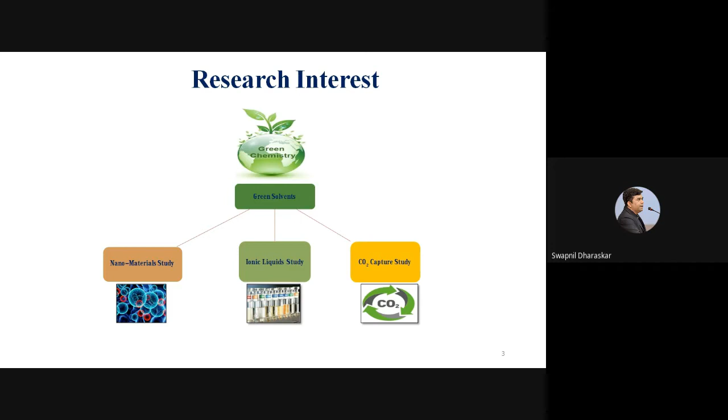As far as the first slide is concerned, I want to highlight that I'm working specifically in the area of green chemistry, under which I'm working on nanomaterials, ionic liquids, and CO2 capture. A couple of years before, we received 2 mega projects in our department under the Mission Innovation Carbon Capture Challenge. I got one project worth rupees 60 lakhs, and I'm working on it to identify the best suitable ionic liquid membrane for CO2 separation efficiency.

And as Dr. Anurag told me, in the first session, Dr. Nitin Lapshetwar sir already delivered a talk on separations and other issues. So I don't want to go much deeper, but I just want to give you an overview of all these processes. But before that, I want to introduce the team members of my research.

Currently, some of the team members from the European side and the South Korean side are involved in our project, along with an industrial partner from the Indian side as well. Professor Mika Sillanpää is currently working as the director of the Department of Green Chemistry, Lappeenranta University of Technology, Mikkeli, Finland, under whom I have done my postdoctoral study as well.

So now to begin with, I just want to give you some highlights about CO2. All of you know that currently we are facing lots of problems in terms of climate change. If you look at the weather outside right now, you can see how it is. For the last 3 to 4 days we have not even seen the sun. This is happening because of climate change, and many of you are already experts in this field.

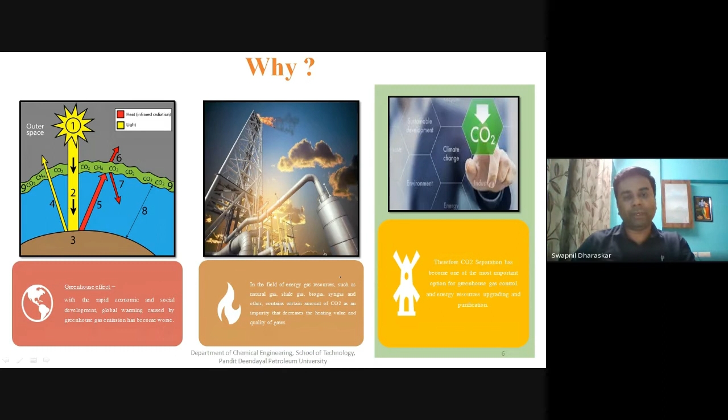In the field of energy, gas resources such as natural gas, shale gas, biogas, syngas and others contain a certain amount of CO2 as an impurity, which decreases the heating value and quality of the gases. That's the second point that motivated us to work in the field of CO2. And third, CO2 separation has become one of the most important options for greenhouse gas control and energy resource upgrading and purification. That's why we decided to identify the best suitable process for energy efficient CO2 separation.

Now, as far as the need of the study is concerned, emissions of greenhouse gases will increase the average global temperature by 1.1 to 6.4 degrees Celsius by the end of the 21st century. And global warming of more than 2 degrees Celsius increase in the global average temperature will lead to serious consequences in terms of the environment and pollution.

Global greenhouse gas emissions should be reduced by 50 to 80% by 2050, according to the IPCC. And to keep the temperature rise less than 2 degrees Celsius relative to pre-industrial levels, CO2 emissions should be reduced globally by 41 to 72% by 2050. And this is the challenge right now.

Even if you look into the Niti Aayog report, they have also highlighted that we have to work on CO2 minimization, because the adverse effects of CO2 are really very impactful in terms of environmental sustainability and other issues as well. Now, basically, this is the basic background of CO2, why we are trying to work on CO2 separation.

As far as the objective of our study is concerned, I don't want to go much deeper into my research area, but I just want to give you an overview of the objective of our work. Based on the entire literature and understanding, we decided to work on a liquid supported membrane, because nowadays there are some commercialized membranes available in the market which are really useful to separate CO2. But again, they have some limitations.

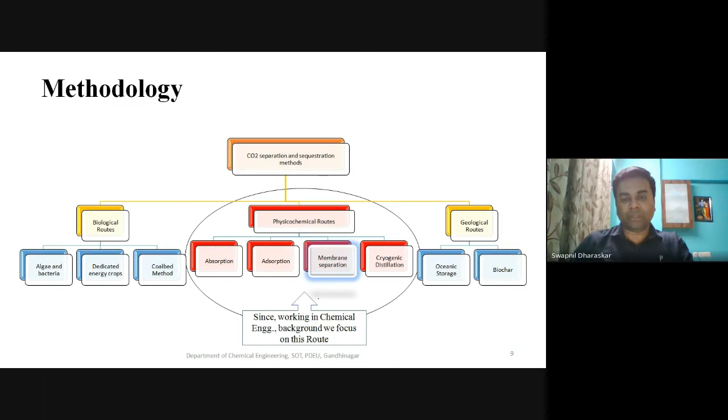But if we go with the physicochemical routes, you can identify different techniques like absorption, adsorption, membrane separation, and cryogenic distillation. Some of my colleagues are working in the area of absorption and adsorption, but we targeted membrane separation specifically. We are trying to use a membrane support and modify it with ionic liquids to produce the best possible support, which is really useful to enhance CO2 separation from the industrial stream. That's why we decided to work on this area, and this is the methodology for our ongoing research at PDEU campus.

Now, I just want to give you a glimpse of why we are working on membrane gas separation processes. Whenever we decide to go for any sort of research or work, we always think about a few parameters, and based on those we can identify whether the process we are preferring is really effective or not. These parameters are cost effective, energy efficient, clean energy, and efficient products and services. And the most important part is fast separation with simplicity of operation and high space economy. For all these parameters, we decided membrane gas separation is a very good option compared to other CO2 capture processes.

In the current state, in our department, we have some colleagues working on adsorption and absorption, and we have compared their results with ours. In terms of flexibility, we have identified that this method is really flexible in comparison with adsorption and absorption processes. But sincerely speaking, at present, most industries prefer the absorption or adsorption route for CO2 separation. But very soon they will identify alternatives to those processes because of other issues and for good efficiency. They may go for membrane or membrane-like separation processes.

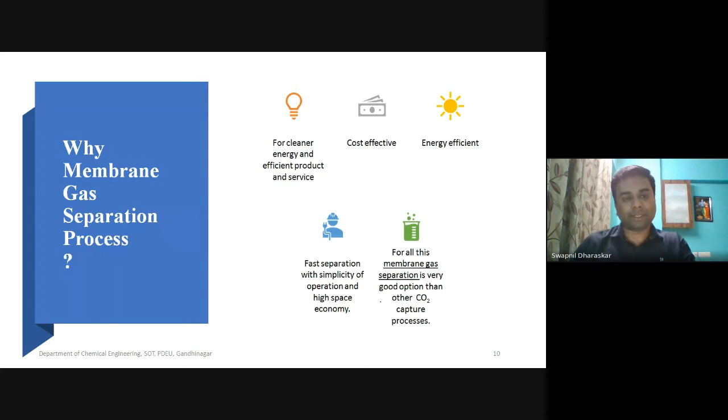Now we decided to work on the membrane in line with the ionic liquids, since basically I did my PhD in the area of ionic liquids and postdoc in the area of molecular simulations and ionic liquids. So I decided to scale up this ionic liquid in support with the membrane, and that's why we decided to club both things together and try to make such an assembly which is really impactful for CO2 separation.

So as I mentioned about the membrane, similarly I just want to highlight some important facts about ionic liquids. Some of you might be aware of what exactly ionic liquids are; basically these are compounds having a melting point above 0 and below 100 degrees Celsius. These ionic liquids have very good properties. Sometimes ionic liquids are termed green solvents as well, because they exhibit green properties.

The first property is high ionic conductivity. The second one is non-flammability, very low vapor pressure, non-volatile in nature, high thermostability. Because as far as CO2 separation is concerned, we do require high thermostability. And in that case,

Dr. Anurag, hope I'm audible to all of you. Yes, sir, you're audible, sir.

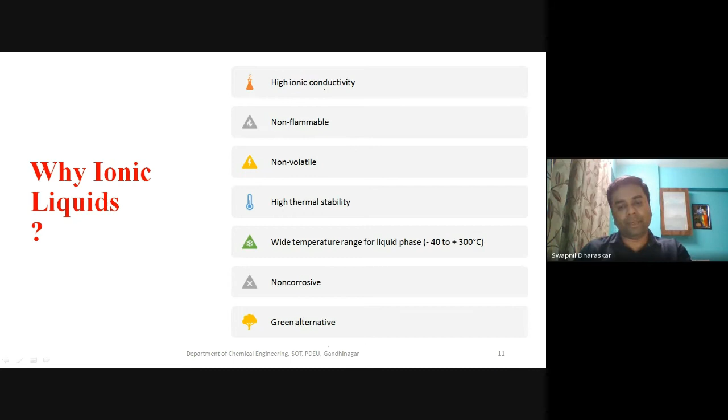Okay, fine, thank you. So these ionic liquids have good thermostability, and based on this, in our research, specifically for CO2 separation, we can make a membrane which sustains high temperatures. Then there's a wide temperature range for liquid phases, -40 to 300 degrees Celsius, non-corrosive in nature, and as I mentioned, it exhibits the properties of green solvents, and that's why it's considered a green material and green solvent as well.

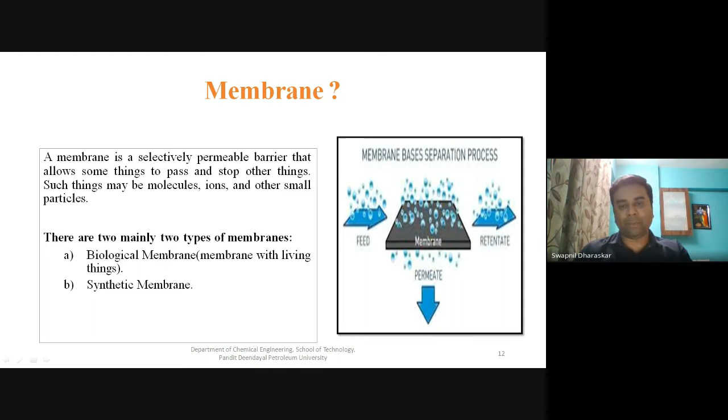Now membrane, I don't want to explain much because many of you are already familiar with it. Basically it's a kind of barrier which allows something to pass and stops other things, such as molecules, ions, and other small particles. There are two types of membrane: biological membranes and synthetic membranes. In our case, we prefer synthetic membranes, or commercially available supports, which we modify with ionic liquids and use for the enhancement of CO2 separation.

Now, the most applied membranes for gas separation fall into two categories: organic membranes and inorganic membranes. Organic membranes include glassy polymers and rubbery polymers with high permeability and low selectivity. Inorganic membranes consist of metals, carbon molecular sieves, carbon nanotubes, zeolites, clay, and silica. These membranes have low permeability but high selectivity.

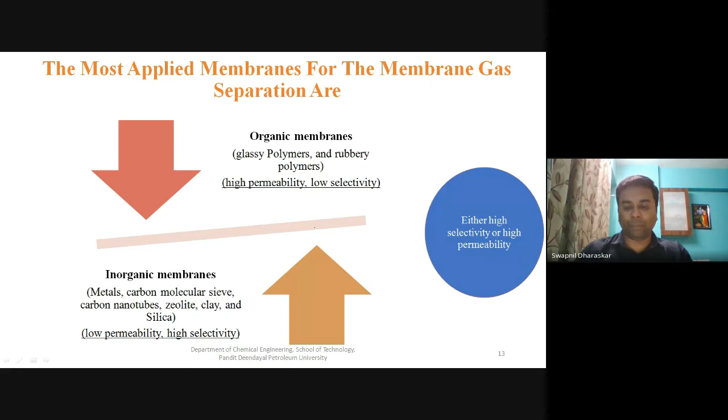Our target is high selectivity, and that's why we mostly prefer inorganic membranes for our study. Sometimes, when high permeability is required, we go for organic membranes. We are doing a comparative study of which membrane is good, organic or inorganic, and where to use which. Based on either high selectivity or high permeability, we decide which membrane support to identify for CO2 separation. These are some membrane classifications.

I don't want to highlight much about it; it depends on symmetric nature, asymmetric nature, and tubular membranes, hollow fiber membranes, flat sheet membranes, dense membranes, porous membranes. In our case, at the moment, we are working on flat sheet, dense, porous, and hollow fiber membranes. So far, we have not tried tubular membranes. We are going for asymmetric kinds of membranes as well. So with flat sheet, dense, and porous membranes, we are working on identifying CO2 separation enhancement.

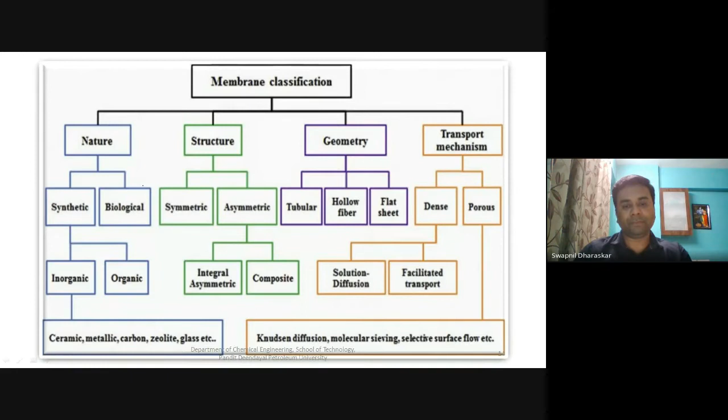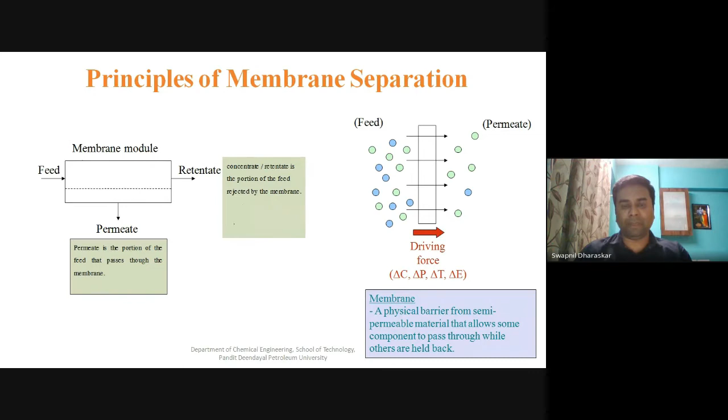Now, this is the principle of membrane separation. It's a physical barrier of semi-permeable material that allows some components to pass through while others are held back. When I show you the schematic of our setup, you will realize how this membrane acts as a proper barrier. So, CO2 separation using membranes: this is the mechanism behind it.

Basically, it's a pressure-driven process where the driving force is the partial pressure difference of the gas in the feed and the permeate. The most important parameters for membrane gas separation are selectivity and permeability. Based on these parameters, we have to select which membrane with which support is best suited for the enhancement of CO2 separation.

So here we use highly selective thin membranes and commercial membranes. There are some membranes available in the market, and right now industry prefers membranes based on polymers and cellulose acetate, but they have a selectivity of around 26 or 28.

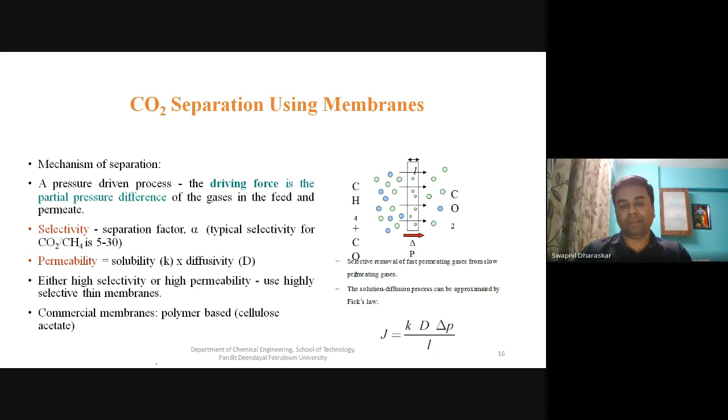But in our case, we are getting the selectivity more than 35. That might be the one factor we can make this technique commercialized in comparison with these readily available polymer based membranes and the cellulose acetate based membranes.

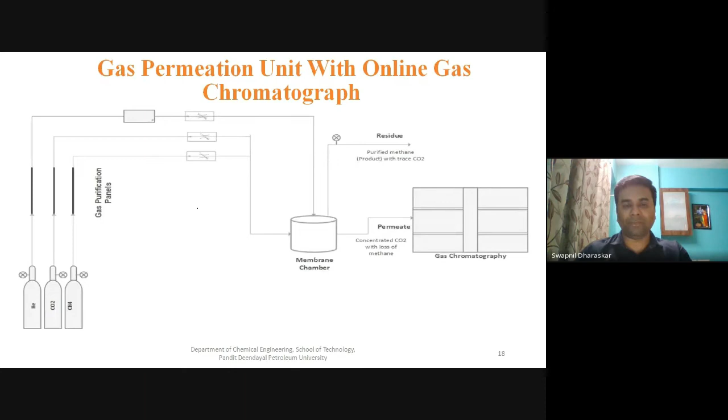Now, this is the schematic of the gas permeation unit with online gas chromatograph. We are having a setup available at our campus. We procured a setup of around 20-25 lakhs rupees of this gas permeation setup, where you can see this is the entire setup of the gas permeation, where we can keep the membrane. There is one membrane module. You can see here. This is the membrane module, flat sheet membrane module.

We have different types of modules to attach here. First, we tried with flat sheet. Then we can go for hollow fiber, and we can prepare porous and dense membrane. And then there are different types of inlets and outlets. Here you can see the mass flow controllers are there. And on another side here you can see the CO2, methane, helium gas, and this is the entire setup.

Here you can see this is the actual membrane module, but we have modified that module, and you can see the entire module, how it works. And we have the provision of the online GC, whatever gas we are passing, let's say in terms of CO2 and methane. So this particular GC will give us the idea about the composition.

Now, let's say biogas contains carbon dioxide and methane. So likewise, we are maintaining the CO2 and CH4 compositions, and we are trying to identify in which ratio we are getting CO2 separation and methane separation. Likewise, we will do some calculations based on some correction factors, and finally we are able to look into the actual value of how much CO2 got separated and how much methane we have separated. So this is the entire setup of the gas permeation, which is available at the Department of Chemical.

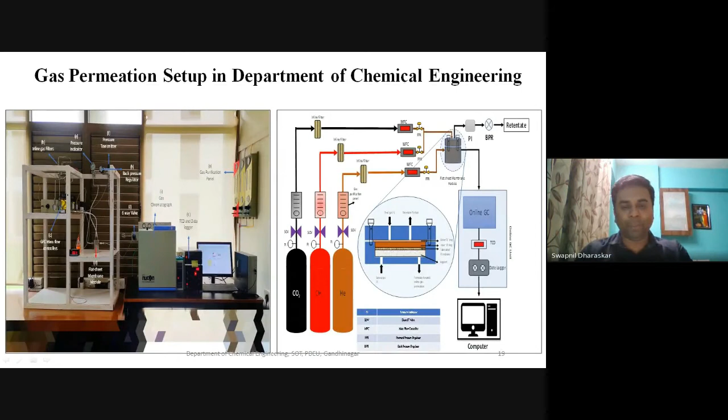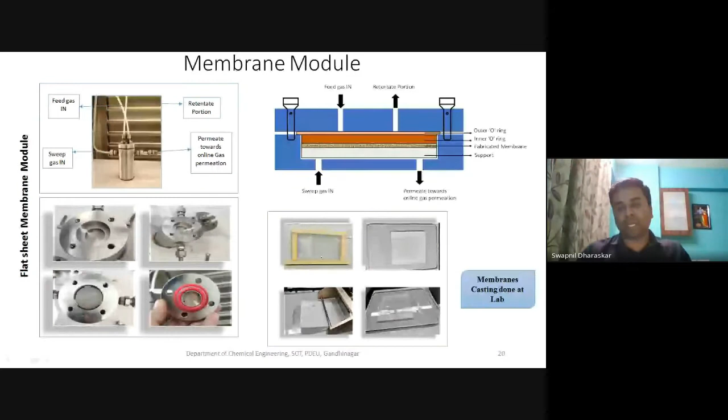Here you can see there are different types of membrane modules. As I mentioned, we are having different types of modules. So this is the actual image of the first flat sheet membrane module, how it looks, and then how we can prepare the membrane. We do prepare membrane. We cast membrane in our department itself. We cast different types of membranes.

Polymeric membrane, cellulosic membrane, cellulose acetate membrane, and PVDF support, PES, PTFE kind of membranes that we cast at our laboratory. And we also synthesized different types of novel ionic liquids to impregnate into this membrane and make a supported liquid membrane, which is really applicable for enhancement of CO2 separation. So these are some routes how we can fabricate the supported ionic liquid membrane, and this schematic gives the idea about how we can cast the membrane.

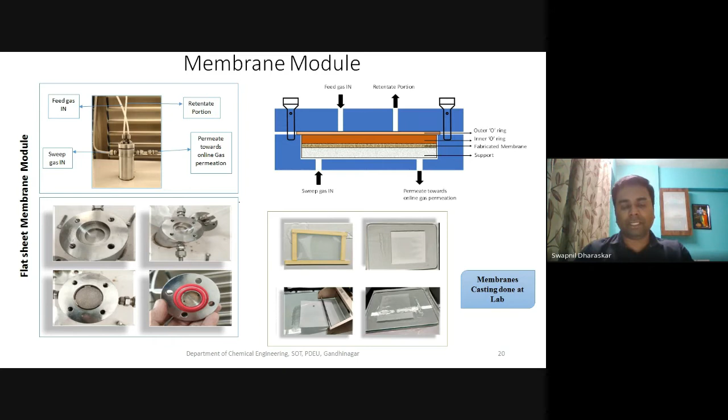Now, this is about the fabrication. Initially, I have given the idea about the setup, how this setup looks. So this is the entire CO2 permeation setup. These are the modules, and this is the fabrication of the ionic liquid supported membrane. Now I'm just trying to give you the idea about what kind of ionic liquids we have preferred earlier, and we published some work based on this idea. And recently we have submitted one idea to file the patent as well.

So if you look into this, first of all, our target is to identify the cost-effective membrane or cost-effective ionic liquid supported membrane. Okay, so that's why we first decided to go with imidazolium-based ionic liquids, which are very easy to synthesize, very easy to prepare, and with the help of very basic facilities, you can easily synthesize this kind of compound at your own laboratory.

But later on, we decided to go for some modified class of the ionic liquid. There are different classes of the ionic liquid like thiazolium, pyridinium, phosphonium, and a few more. But since the toxicity matters, we have not preferred thiazolium. We went for pyridinium, and then imidazolium and phosphonium. And some of the results from phosphonium and pyridinium were very impressive, and based on that we decided to file one patent based on those results.

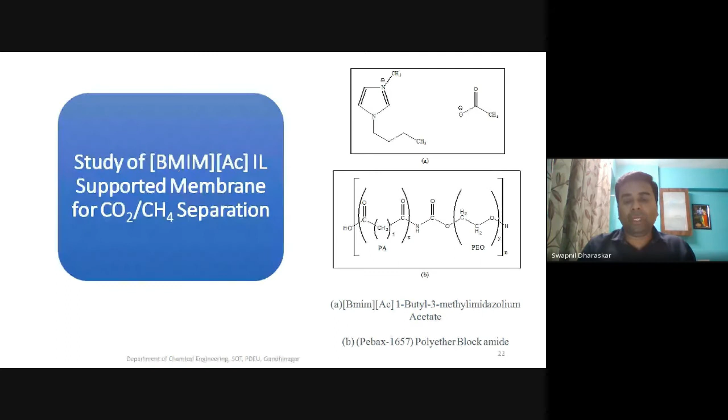Since ionic liquid is costly, we prepared different supports with some weight percent. Let's say first we have taken 5% of ionic liquid and we prepared a 5% ionic liquid supported membrane. Then we go for 10%, 20%. Likewise, we have prepared up to 20% ionic liquid supported membrane, and we have done analysis for the CO2 separation for all these membranes, and the results are pretty impressive.

Even if you are continuously purging this CO2 and methane, still there is no breakage happening in the membrane, though there might be some pores that got blocked. But as far as breakage is concerned, we have not seen any breakage occur during the operation, even prolonged operation. And that's why we decided to go for some support which is really useful in terms of withstanding high temperature, high pressure.

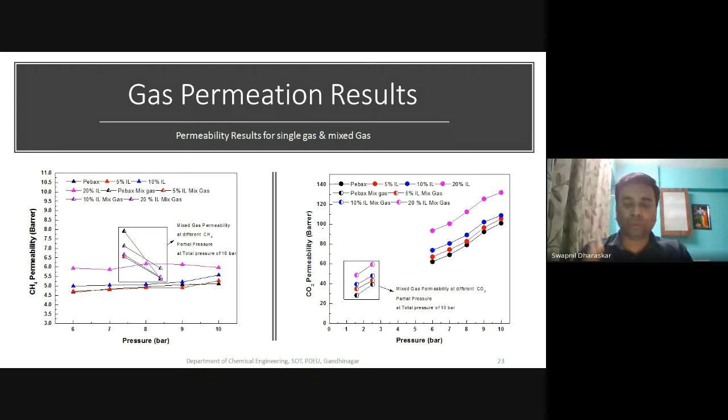And that's the uniqueness of our project, because when we got the project, the committee gave us one task: Swapnil, if you are capable enough to prepare such a membrane which withstands more than 5 bar pressure, that will be a good thing for us. So at this moment we have identified a few supports which are really useful to withstand pressure up to 7 to 8 bars.

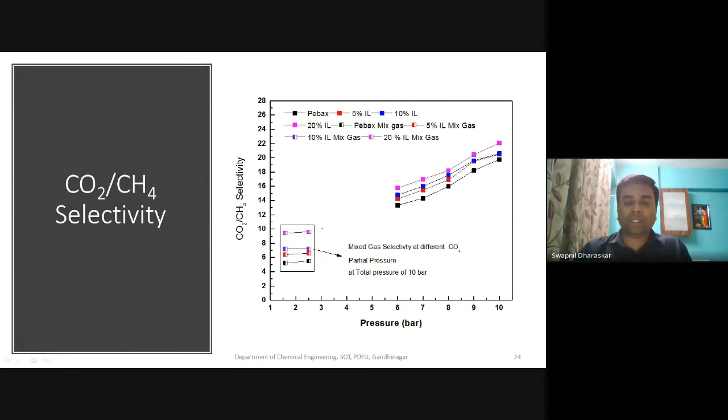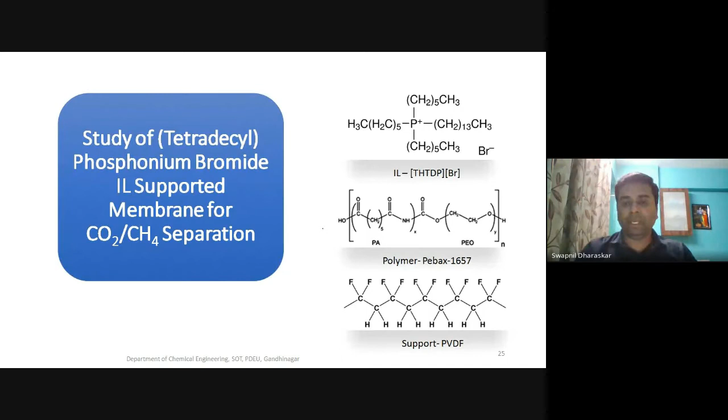So this is about the CO2 methane selectivity. As I mentioned, permeability and selectivity are the important parameters, and we are extensively working on these two parameters to measure the effectiveness in terms of the separation of the CO2. Earlier we decided to go for imidazolium. Then we shifted from imidazolium to a phosphonium bromide kind of compound. And with the study of this phosphonium, we have received promising results, and that we also published in an ACS journal, where these results have been claimed.

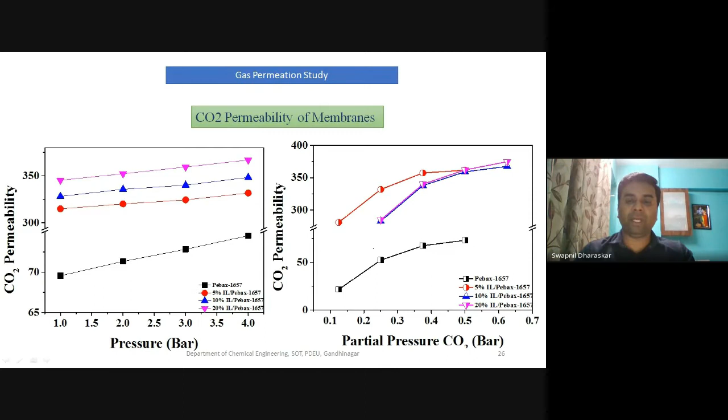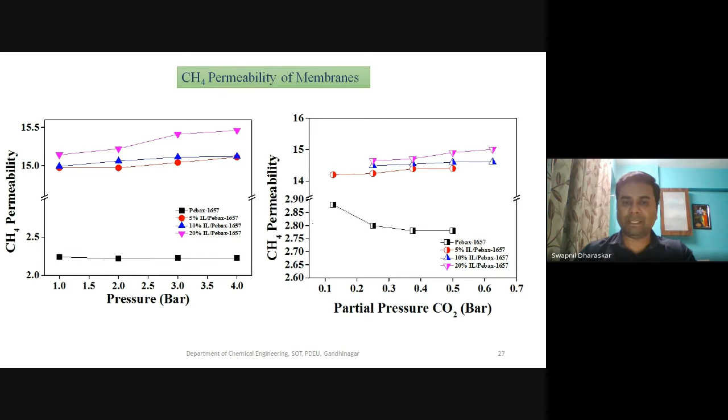And here you can see the CO2 permeability with 5 weight%, 10 weight%, and 20 weight% ionic liquid. At the initial level, we had taken the support as a plain Pebax, but here we have changed the support from plain to Pebax-1657. And again, we are identifying up to what pressure this particular membrane withstands, and with the phosphonium based ionic liquids with some membrane support, we were able to identify that this particular support withstands 8 bar pressure very easily without any breakage during the operation. So this is all about the permeability and the selectivity, and this is some data of CO2 and methane separation.

I don't want to go into much detail about it, but keep in mind one parameter here: the selectivity matters a lot, selectivity and permeability. If you are able to get a good selectivity, then definitely your separation will enhance, and that's why your role is to identify the best suitable membrane support, in addition to the ionic liquid as well.

And other than ionic liquid, you can try it with some nanofluids. Some of my researchers are working on this now. We are shifting from ionic liquid to the nanofluids, and we are also targeting work on the deep eutectic solvents. In these two areas right now, many researchers have diverted their study from the ionic liquid into the deep eutectic solvents and nanofluids, specifically for the enhancement of the CO2 separation.

Okay. So this is about the CO2 separation, and I hope we will take the questions at last. But this is all about the CO2 separation, the exact process for the CO2 separation. So as I mentioned, the gas separation, gas permeation membrane processes is a very efficient process for CO2 separation, and that's why we are claiming this particular process is really good in comparison with the absorption and some other routes also.

Some of the researchers claim that the biological route is also very effective. Obviously, it will be really effective, but there are some limitations. You cannot work on the biological route for the entire year. You have to maintain certain specific conditions. Many of you might have heard the name of ICT; they have developed their own lab to generate some algal kind of things, and through algal biomass they are able to capture and separate the CO2. But here, in our case, we could not do that. That's why we decided to go for this particular process.

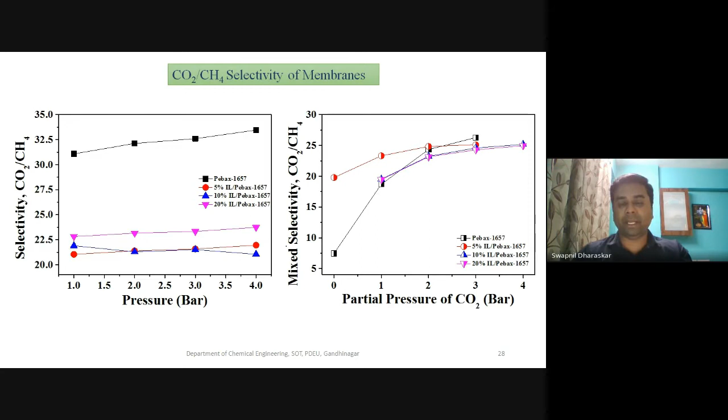Now, I just want to highlight something in line with the nanomaterials. Whatever I mentioned so far is in line with ionic liquid supported membrane for CO2 separation. Now I'm slightly changing the topic from ionic liquid supported membrane to nanomaterials, and I'll give you the idea how these nanomaterials also create good impact in terms of environmental sustainability and the CO2 separation as well. Some of you might be comfortable synthesizing nanoparticles, and many of you have the idea of the prerequisite to identify the best efficient nanoparticles.

Okay. So basically, if I want to identify the best efficient nanoparticle, then I must go for two parameters. Whenever I'm planning to synthesize the nanoparticles or nanomaterial, it should have a high surface area with good chemical reactivity. Basically, in nanoparticle synthesis, we always think about uniform size, shape, and distribution. These two parameters, size and shape, play a very important role. If you are able to maintain a uniform size and shape, then ultimately you can get a high surface area, and that high surface area gives you good chemical reactivity for the conversion to the final product.

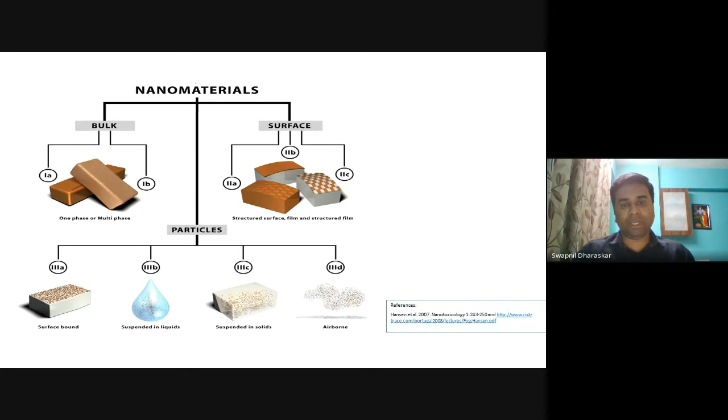That's why we decided to go for the nanomaterial, and we diverted some of our research into the nanomaterial, and some of the researchers are working in the field of nanomaterial as well. If you classify the nanomaterials, there are different classifications like 0D, 1D, 2D, and 3D nanoparticles. For example, 0D nanoparticles are the common kind like alumina-based nanoparticles, titanium dioxide nanoparticles, calcium oxide nanoparticles, zinc oxide nanoparticles.

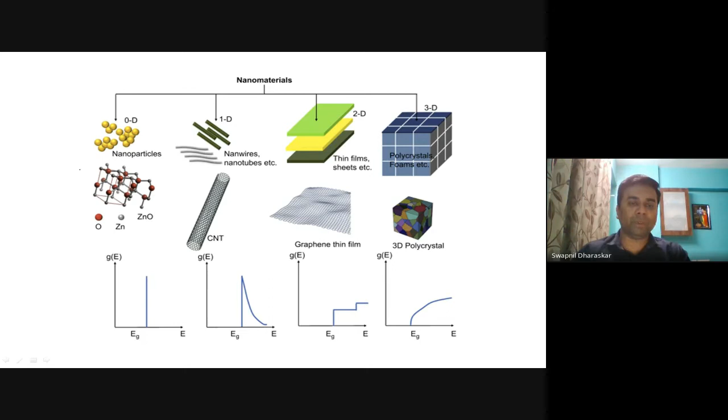1D means one-dimensional nanoparticles, where carbon nanotubes and some graphene oxide or some sort of nanoparticles come under this category. Graphene thin films or graphene sheets come under the category of 2D nanoparticles. And 3D nanoparticles are like polycrystals and foams, where we depend on size, shape, and length of the nanoparticles. In 2D, we just go for size and shape. In 1D, we go for size, and 0D maybe just one parameter, right? These are some different types of the nanoparticles family. You can see these are layered materials.

If we consider the graphene family, the most efficient graphene nanoparticle under this family is graphene oxide. Nowadays, many of the researchers change their research area from graphene oxide to MXene, because MXene is giving good results in terms of water purification. But as far as CO2 separation is concerned, still very few researchers are working in the area of MXene.

That's why we decided to compare, because we have already done lots of work in the area of graphene oxide for CO2 separation, and we have already done some work to develop nanofluids and identify their application for CO2. But we are now emerging into some more areas, that is MXene, and we are trying to synthesize advanced materials like MXene, which give us good CO2 separation efficiency. Then 2D chalcogenides; here you can see these are different types of nanomaterials.

Then you can say molybdenum, selenium, and then different types of compounds which are really useful for semiconducting kinds of properties. Then layered semiconductors. Here you can see the different materials, bismuth based, gallium based, and then here you can say metallic dichalcogenides, titanium sulfides, then other kinds of things are there. So these kinds of nanoparticles also created good impact for CO2 separation as well.

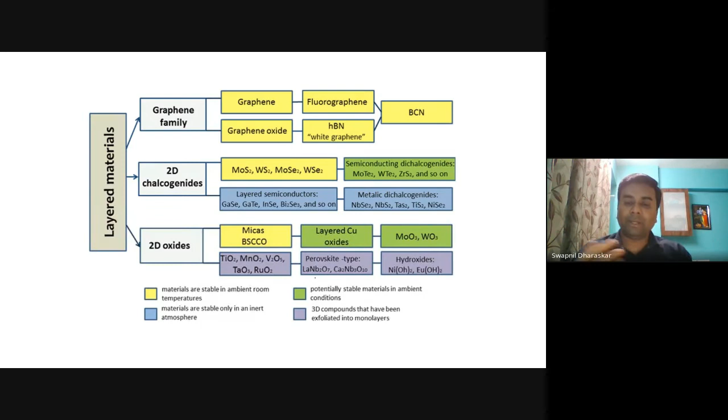And then the 2D oxide family, where titanium dioxide, MnO2, vanadium pentoxide, TaO3 and ruthenium based oxides, these kinds of nanoparticles have some impacts. And then layered oxide, layered cuprous oxide, you can say perovskite type, because nowadays, if you belong to the solar department, many researchers are working in the area of perovskite, and they are identifying their applications in all ways. And this is all about the nanomaterial family.

Now, there is a basic difference between graphene versus graphite. If you look into graphene and graphite, in graphene the bonding and the orbitals are really, really stronger. And that's why we have to go for graphene and graphene based sheets. And this particular structure is really useful for any kind of separation. Not simply for CO2, but for water purification or some other major applications as well.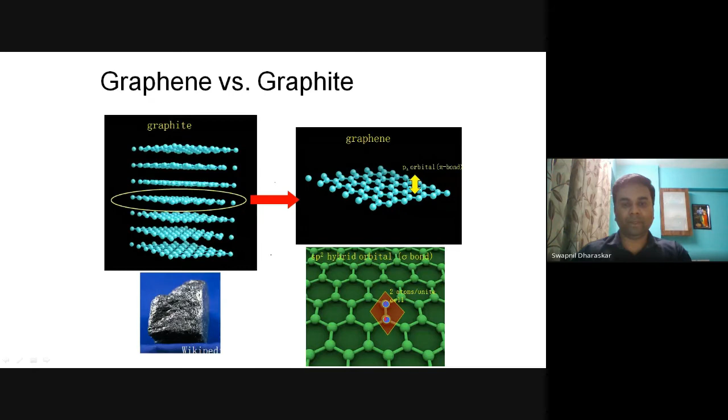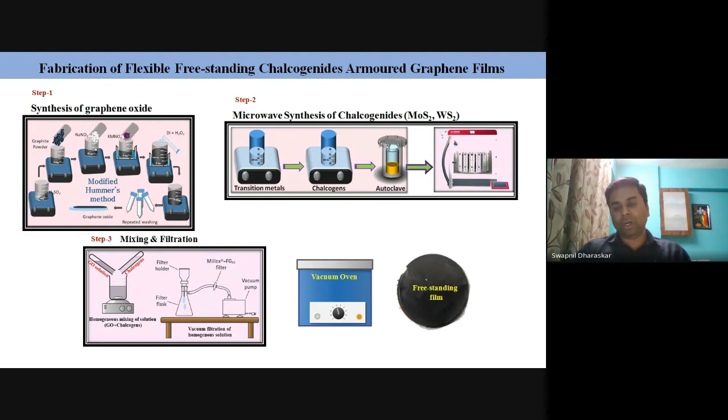Now here, this slide gives you the idea about how we synthesize the different types of nanoparticles, including the synthesis of graphene oxide. You can see here, step 1, we have synthesized the graphene oxide. Step 2, with the support of microwave synthesis, we have done the synthesis of MoS2 and WS2, then third is the mixing and filtration stage, and then vacuum oven, and finally we are ready to prepare a modified film of the graphene oxide, or a bead of the graphene oxide.

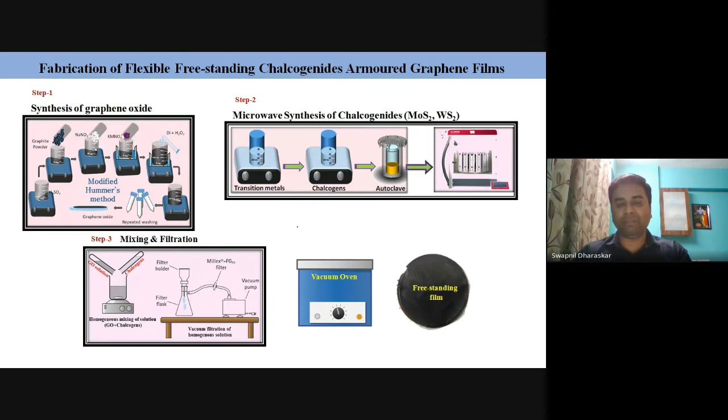And this particular film is applicable for CO2 separation. As of now, we have not used this particular film for CO2 separation, but we are trying to utilize this graphene oxide modified sheet for CO2 separation. And these are the various nanomaterial syntheses, as I gave you the idea about single materials, binary nanocomposites, and ternary nanocomposites.

Right now, we are doing some work in connection with Sunway University, Malaysia, Taylor's University, Malaysia, and the University of Nottingham, Malaysia. With these universities we have strong connections, and we are trying to develop different types of advanced nanomaterials, advanced MXenes for separation applications. Let's say applications in the oil industry or fuel industry, or nano-based industries and other things.

So here, these are the graphene oxide, metal oxides, carbides, and then binary nanocomposites. We are targeting conducting polymeric kinds of nanomaterials, where these are the various compounds: mixed metallic carbon-based compounds, that is graphene oxide, carbon nanotubes, and porous biochar. And ternary nanocomposites, these are the various mixed metallic carbonaceous materials.

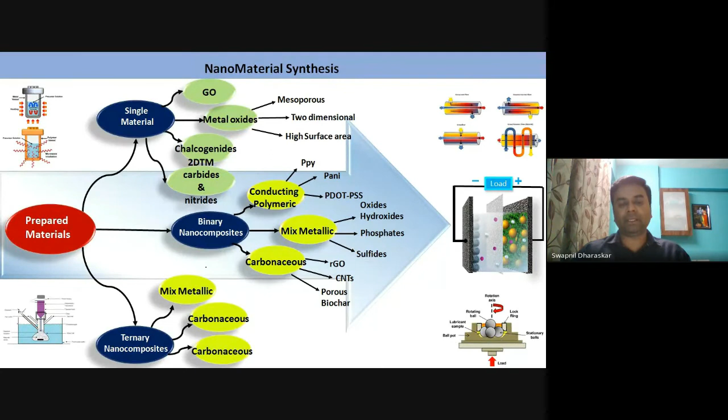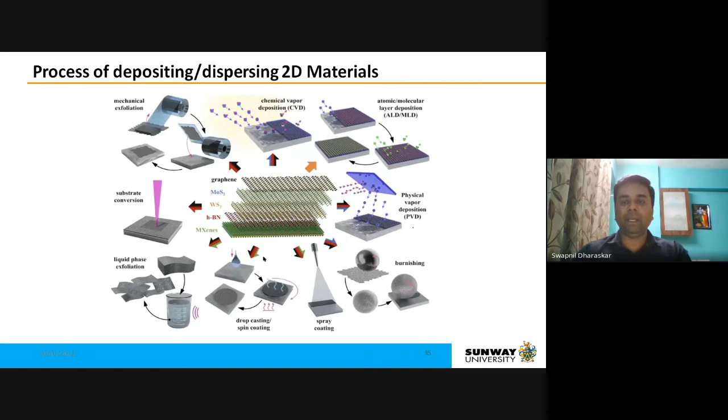Okay, so this is one slide which I have taken from Sunway University. We are doing some collaborative work with Sunway, and you can see how we can prepare different types of nanomaterials with the support of various processes like CVD, PVD, sol-gel and some other techniques as well. And recently, one of my collaborators has established a good setup for MXene development.

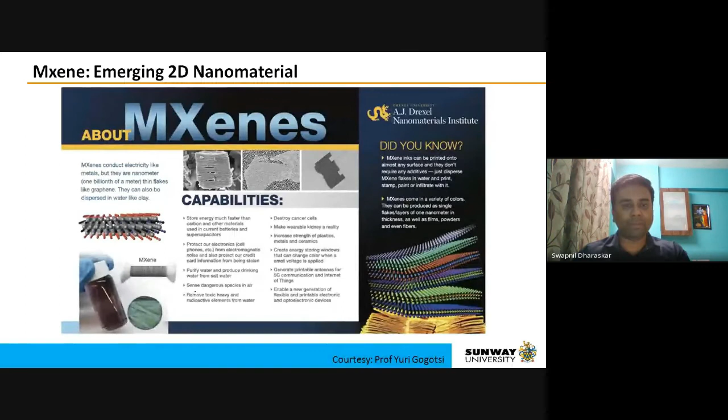Now we are also targeting to develop some carbide based or titanium based MXenes, which have the capability to be used for water purification and CO2 separation. That's what we are targeting. As of now, we have not done any study on MXenes, but we are slowly emerging into MXene compounds and trying to do something in line with CO2 capture. And these are some chemical structures and compositional diversity of MXenes. MXene applications.

This area is very good. I request, if you would really like to do some good research in energy storage or energy conservation and management, you can look into MXenes. There are different classes of MXenes. MAX phases are there, and you can synthesize different MXene compounds, and each individual compound has different applications like energy storage, catalysis, electronics, environmental applications, sensors, biology. One of my colleagues developed a biosensor using MXene, and that got published as well. So this particular area is really an emerging area to work on.

Now, this is all about a nanoparticle. Now I just want to give you some glimpse about nano research, how, with the applications and the use of nano, we can strengthen some areas. So there are some areas; I just want to highlight some of the case studies, and some of you might be familiar with these case studies.

Solar cell. Solar cell is a very common terminology, but nowadays it's very popular. In many parts of Gujarat, the government established solar panels, and I think this is a good choice to create electricity, right? So a solar cell is a device which converts solar energy directly to electricity using the PV effect. But I don't want to discuss much about the solar cell because this is an already established technique; I just want to highlight something.

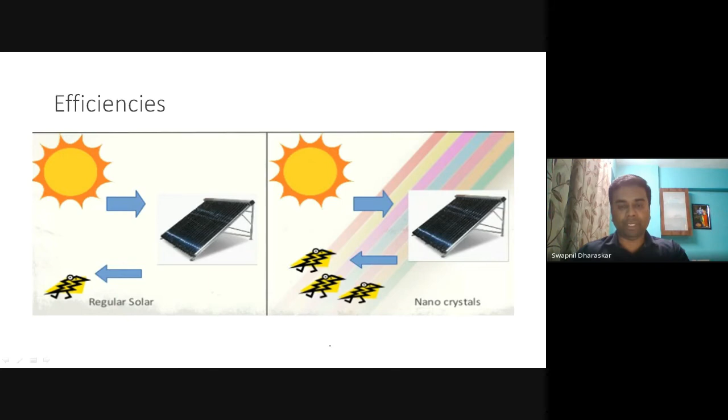You can see here, this is a regular solar cell and this is a nanocrystal based solar cell. In the regular one, radiation comes to the solar panel, and with the conversion you are able to store some amount of energy. But on the other side, this is the DSSC, dye-sensitized solar cell. Here you can convert and store the electricity in a shorter period of time with better effectiveness, right? This is a very new and very popular concept nowadays in most Western countries and Europe.

In many sectors, the plastic solar cell is most popular. There are many advantages of this plastic solar cell compared with the normal solar cell. They are 30% more efficient than the conventional solar cell. 30%, it's a high jump. And conventional solar cells have bulky solar panels, while these are quite compact. If I use a plastic solar cell as a roof, and tomorrow I decide to move it to some other place, I can easily disassemble it and take this roof.

Swapnil sir. Yes. Sorry. If you want to take a break of a couple of minutes, because I think your throat is aching, I can feel that. Yeah. So, okay, just give me a minute only. Okay. You can have some soothing drink. Yeah. Just give me a minute. I just want to take some warm water. Okay. Just give me a minute, please.

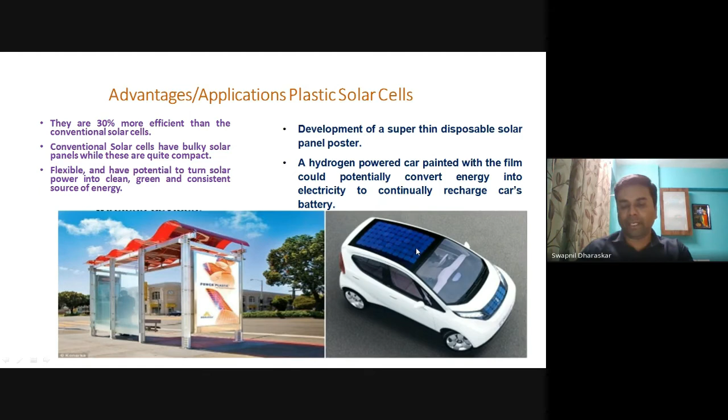Even if you look at the roof of this car, if you place a plastic solar cell on the top roof of the car, it can even charge the batteries as well. So this innovation is nowadays very popular and very familiar. You guys are familiar with this kind of innovation, and there are lots of commercial examples. Many industries are using these particular techniques, and all these techniques are established with the support of nanomaterial applications. And that's why if you work on energy efficient nanoparticles or nanomaterials, then you can develop some good techniques which may have some commercial value.

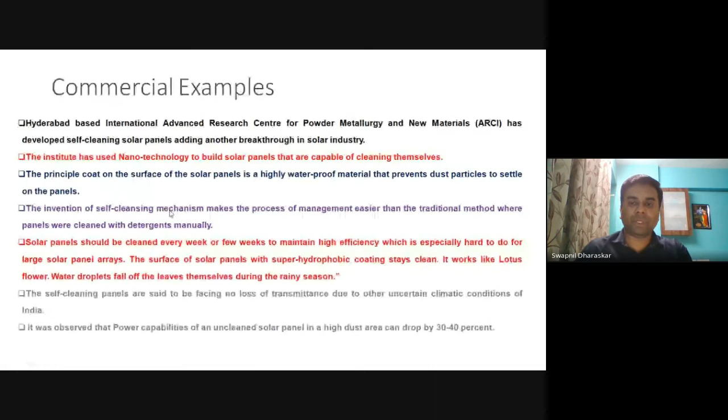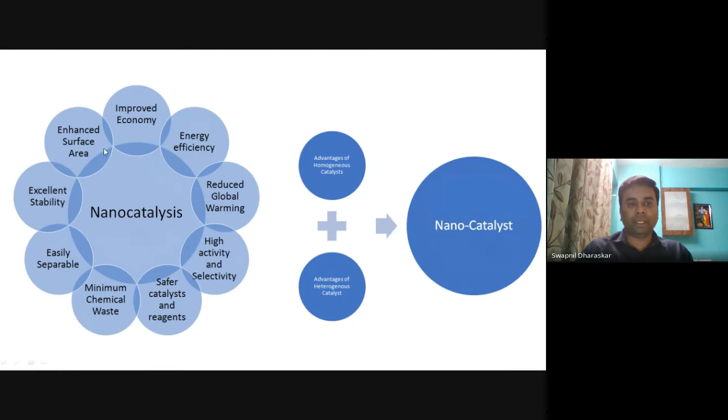Now, if I talk about another case study, that is nanocatalysis. Okay. So as we all know, in nanocatalysis there are certain parameters: improved economy and energy efficiency, reduced global warming, high activity and selectivity, safer catalyst and reagent, minimum chemical waste, easily separable, excellent stability, enhanced surface area. So these are certain parameters which are really required at the current need of the time.

And that's why if you use a nanoparticle as a catalyst, then they have lots of applications in various diversified areas: environmental protection, photocatalytic activity, drug delivery, water purification, fuel cell application, solid rocket propellant, biodiesel production, and thin film solar cells. These are the wide applications of nanocatalysts. But I'm just trying to highlight the application in terms of biomass gasification.

If you look into biodiesel production, the most commonly used catalysts for biodiesel are calcium oxide, zinc oxide, aluminium oxide, and MgO. So these are some nanoparticles which make the process of biodiesel very effective. Biodiesel is usually produced by a transesterification reaction in the presence of a catalyst. So use of a conventional catalyst may compromise the yield, quality, or efficiency of the process. There are so many catalysts we can use, but they are normal catalysts, and they have some problems in terms of yield and conversion, and that will affect the quality of the biofuel and biodiesel.

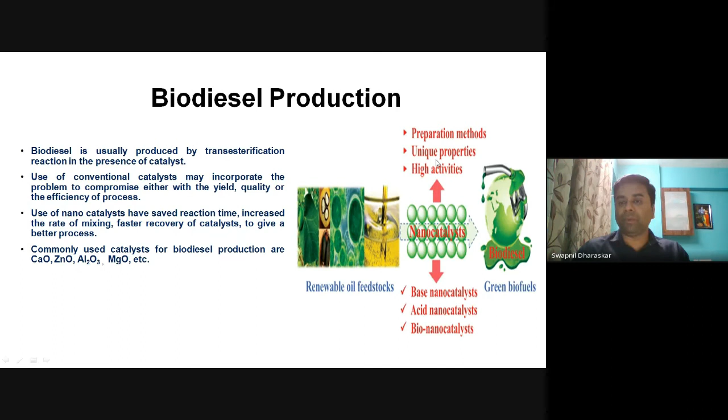That's why we use nanocatalysts, which save reaction time, increase the rate of mixing, and give faster recovery of the catalyst for a better process. Okay, so that's why some nanoparticles or nanocatalysts play a very important role and are very useful to give you good quality biodiesel with high activities and unique properties. So that's why there is application of nanocatalysts in biodiesel production as well.

And some research has already been done in the field of nanocatalysts, where they identified a calcium oxide catalyst with an efficiency of 96.8%, and based on the characteristics of the nanocatalyst, that means enhanced catalytic activity, stability, and more resistance to acid poisoning, it gives you good efficiency. But the most important catalyst to give you good efficiency is zirconium oxide. But if you compare ZrO2 with calcium oxide in terms of cost, this CaO is very much cost effective.

Okay, even though in terms of efficiency we are lagging by only 1.2%, we are not much concerned about it, because the cost of CaO is less compared to ZrO2. That's why we can go ahead with calcium oxide or titanium based oxide nanoparticles, specifically for biodiesel production. These are the recent innovations. One of the recent innovations is the use of nanocatalysts having magnetic properties. This property eases the separation of the nanocatalyst in the presence of an external magnetic field with minimum loss.

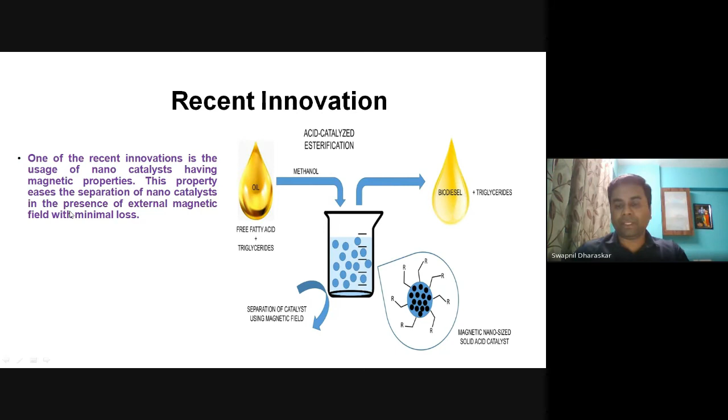So if we want better conversion or better purification of the biodiesel, then you can go for magnetic based nanoparticles, which enhance and ease the separation of the biodiesel. These are the commercial applications of these nanomaterials, which offer many possibilities as catalysts to meet future demands in the following technologies: petroleum refining, petrochemical industry, synthetic fuel, polymer, pharmaceutical, food. Everywhere there's a huge demand for nanomaterials in these various processes.

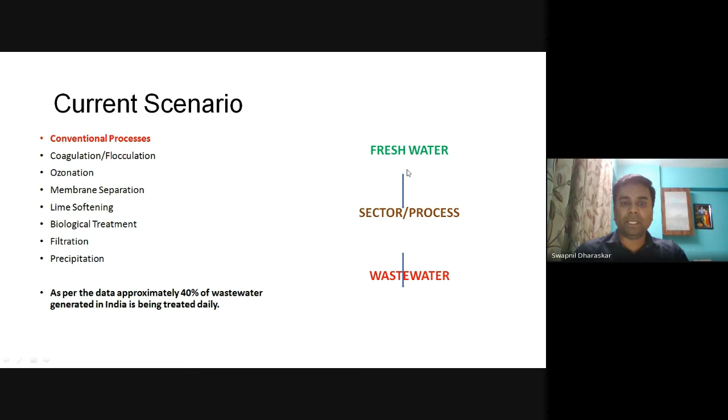I don't want to highlight much about nanotechnology in water treatment. You can see there are various sectors, and I think many of you are familiar with this scenario, what techniques are really good for water purification. But I just want to highlight one thing here.

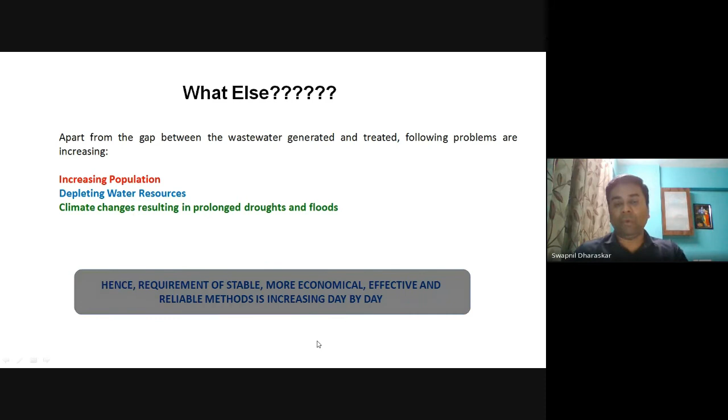Everybody is looking for a stable, more economical, effective, and reliable method, which is really a need increasing day by day. And whenever we go for any research, these parameters come into play, and we are more focused on these few parameters. That's why, before picking any topic for research or for actual implementation, we always have to look into their effectiveness, their performance, and other things.

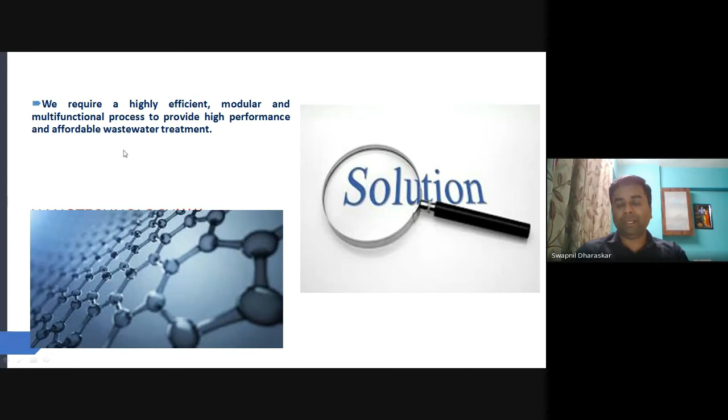So we require a highly efficient, modular, and multifunctional process to provide a high-performance, affordable, environmentally sustainable wastewater treatment process. There are different processes, out of which we can say nanosorption is the best one. And there are so many nanoparticles which play a very important role to purify the water: graphene oxide, fullerene, nanodiamond, NPC, carbon nanotubes, and at the top you can see you are able to remove the various compounds.

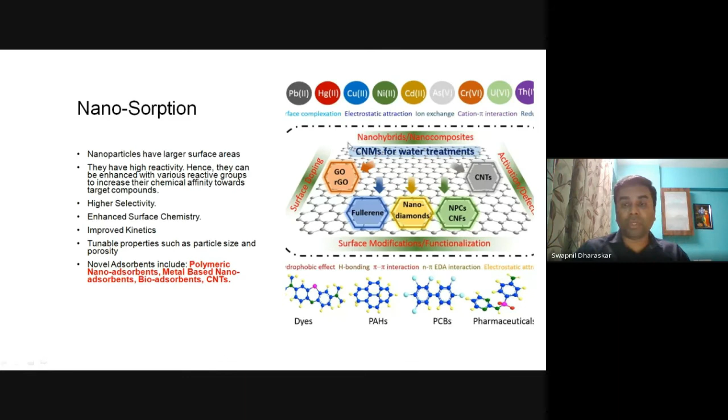One of my research groups is working in the area of development of advanced materials for emerging pollutant removal, where we are targeting various kinds of heavy metals like mercury, cadmium, arsenic, and chromium. Recently, one of my PhD scholars published her research work in the Journal of Molecular Liquids, completely based on the chromium Cr(VI) compound. She synthesized a chitosan-based nanoadsorbent and identified its application for chromium removal.

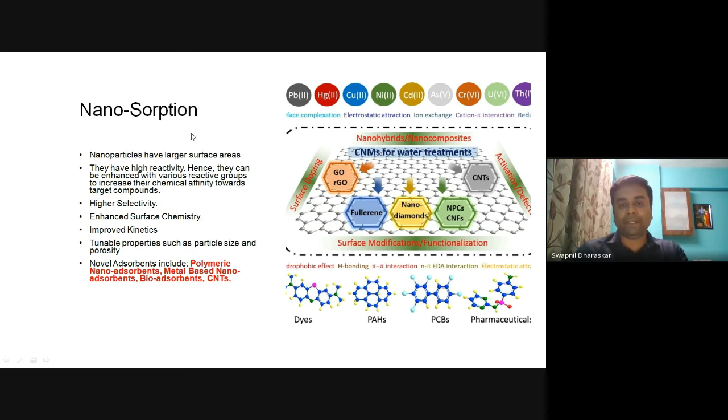So there are certain parameters: higher selectivity, enhanced surface chemistry. And if we look into the nanoadsorbents, some names are metal-based nanoadsorbents, bioadsorbents, and carbon nanotubes, including graphene oxide. These give good results in terms of removal of these particular compounds from water.

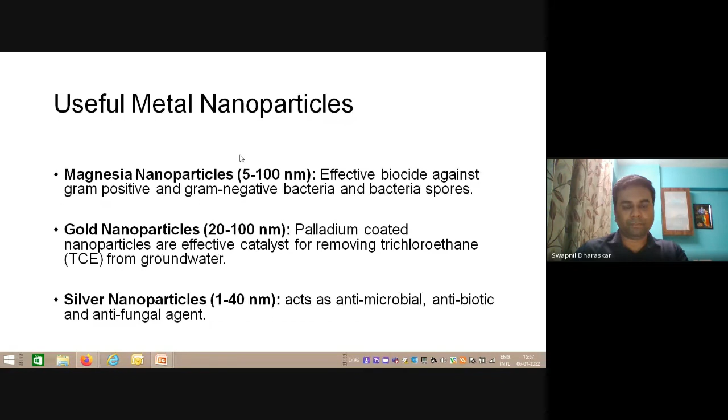Okay. I just want to skip certain slides. Yeah. Yes, sir.

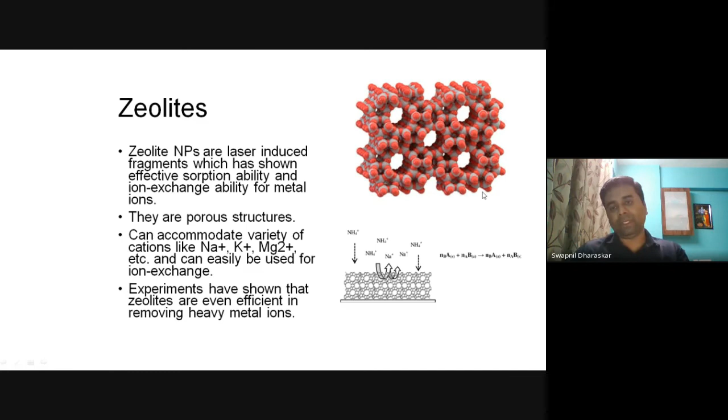So this is zeolite. This is one kind of MOF structure, metal organic framework, which is also applicable for CO2 separation. Recently, we have synthesized a ZIF-67 kind of framework, which is really efficient for CO2 separation. And there are certain barriers when we go for this kind of technique which really matter a lot: the cost of nanoparticles, as some nanoparticles have a high synthesis cost. Some nanoparticles are toxic, and some have potential human health hazards and risks.

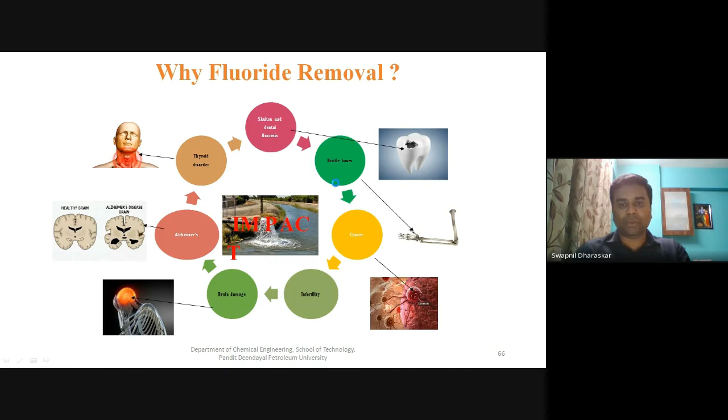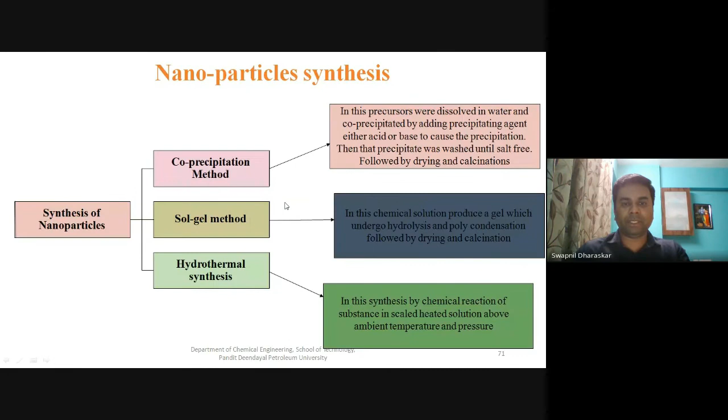Okay, there is some of my research work, but I don't want to highlight that work much here. I'm just trying to give you an idea about one final emerging technique. So this is the third point. First, we had a discussion on CO2, then on nanomaterial research. Now I'm trying to give you a glimpse of how ionic liquid techniques for cleaner fuel production really serve the purpose of addressing environmental problems.

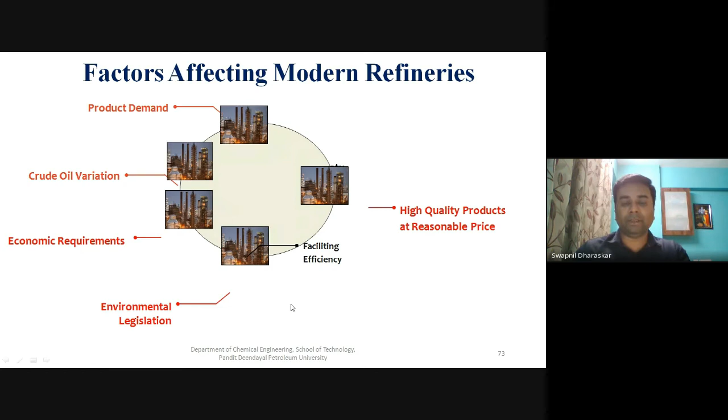We have filed a couple of patents and published lots of papers in the area of desulfurization processes, and one of our research scholars is still working on the minimization of sulfur in fuel. If you talk about the need for this study, as we all know, under BS4 emission standards the sulfur range was different, but currently we are running with BS6. So all of a sudden the sulfur requirement drastically changed.

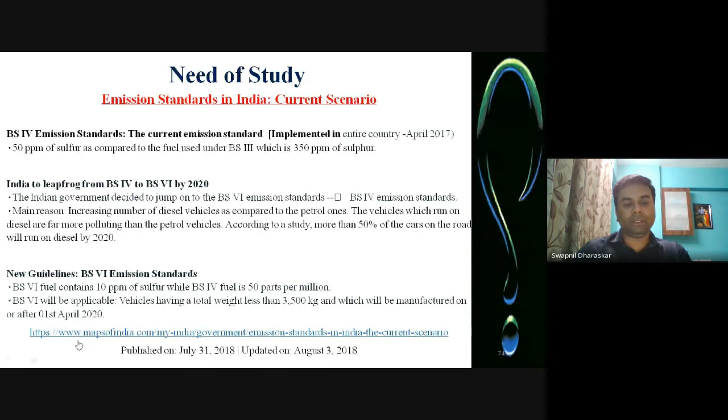Now we don't require sulfur of more than 10 ppm in actual fuel, and we are able to achieve that in BS6. That was the ultimate aim of our study when we picked this topic around 2017. BS6 fuel contains 10 ppm of sulfur, while BS4 fuel has 50 parts per million. BS6 is applicable to vehicles with a total weight less than 3500 kg manufactured on or after 1st April 2020. We have kept this figure with the support of published news.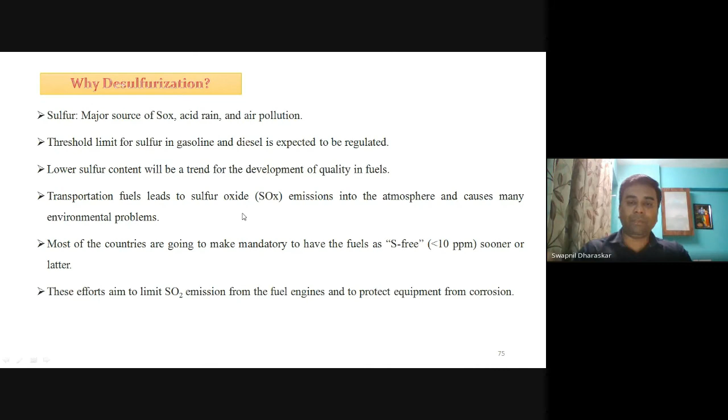Then we decided to go for the desulfurization process, and I want to highlight a few facts about why we need sulfur-free fuel. The important parameter is minimizing the environmental pollution load in terms of SOx and NOx, and that's why many countries, earlier during BS4, made it mandatory to have sulfur less than 10 ppm, so we can consider this fuel a clean fuel. Earlier, 50 ppm or 180 ppm sulfur was present in fuel, which caused major environmental issues. That's why BS6 norms are applicable from now on.

Then we decided to go for sulfur removal based on the various studies. And one of our research groups is actively involved in sulfur recovery. As I mentioned, we have a strong relationship with Apar Industries Limited.

This time we are working on the base oil. Earlier we were working on gasoline, diesel, and some other kinds of real fuels. But as far as the BS6 norms are concerned, that particular fuel doesn't have sulfur content more than 10 ppm, so we are not working on that. Now we are working on industrial-based fuel where the sulfur content is more than 3000, 4000, and we are trying to identify the best suitable solvent to minimize the sulfur from their base oil and their fuel.

So there are different methods. Here you can see this comes in the category of desulfurization, but specifically we targeted ultrasound, membrane, and extractive. I have done research in the field of extractive, but one of my research scholars is doing research in oxidative and ultrasound-assisted desulfurization processes.

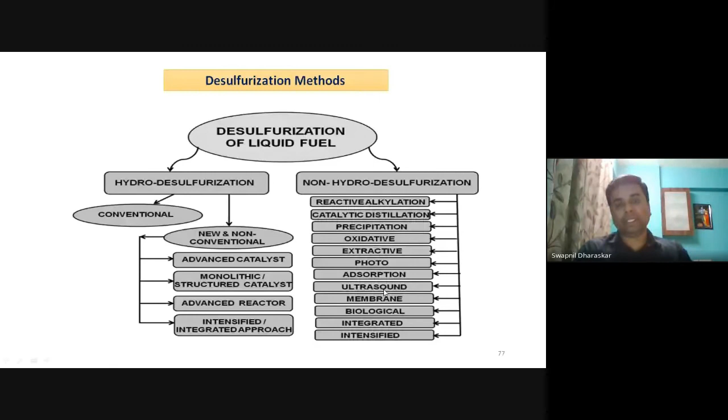So basically there are certain parameters which make this process very effective. As we all know, whatever solvent or extractant we prefer should have certain attributes: good extractive ability, free of contamination, non-toxicity, and stability for repeated use.

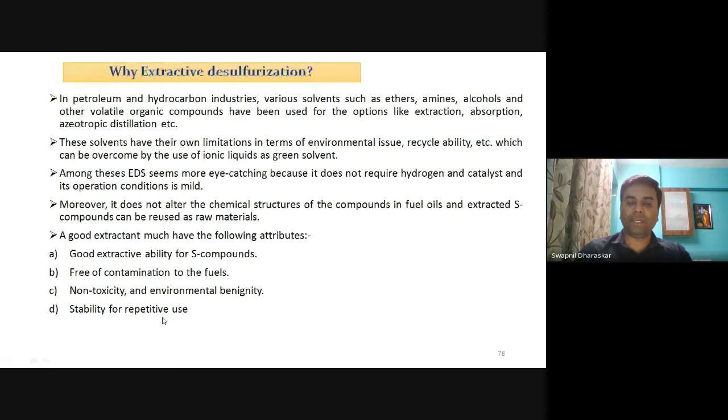Now there are different types of ionic liquids, as I gave you the idea earlier during the CO2 study: imidazolium, pyridinium, phosphonium, ammonium, sulfonium. I don't want to prefer these two compounds because of their regeneration issue and their extracting capability, so we don't want to go for ammonium and sulfonium. We always target imidazolium because it's very easy to prepare and very cost effective.

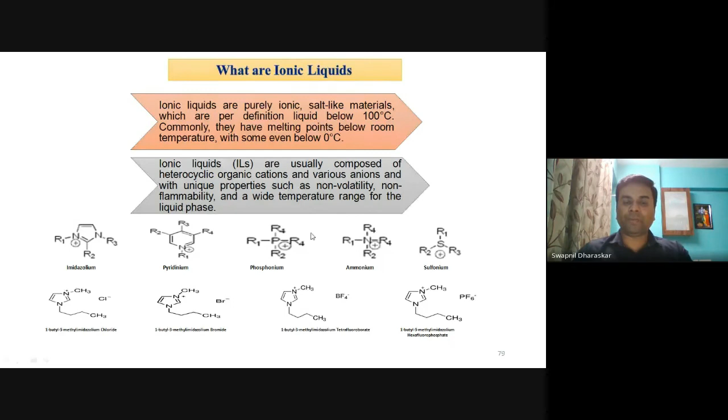Pyridinium, again. But as far as phosphonium is concerned, the synthesis of phosphonium is a little bit difficult, but in terms of effectiveness, phosphonium ionic liquid really has a good impact in comparison with all these other ionic liquids.

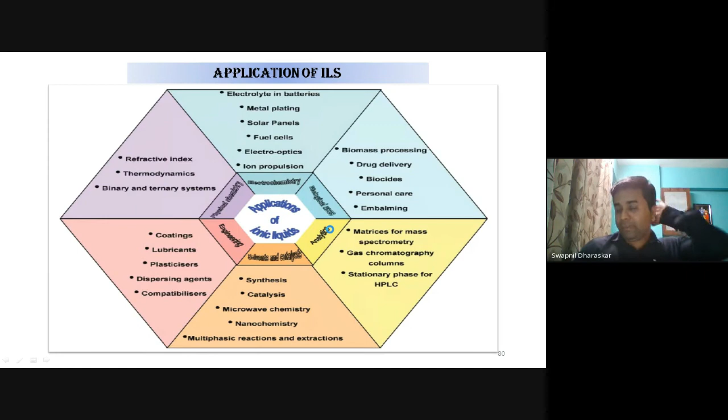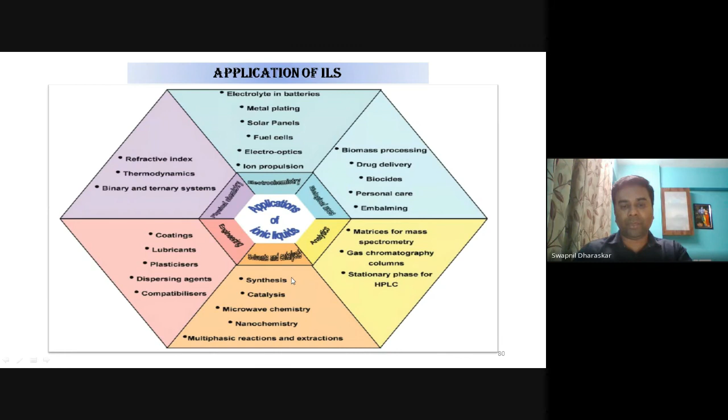If we talk about the applications of the ionic liquids, there are various applications including all sectors, and we specifically targeted synthesis, multiphasic reactions, and extractions. That is the particular region where we targeted the applications of the ionic liquids. We have done an extensive literature survey for that, and we identified the best possible compound.

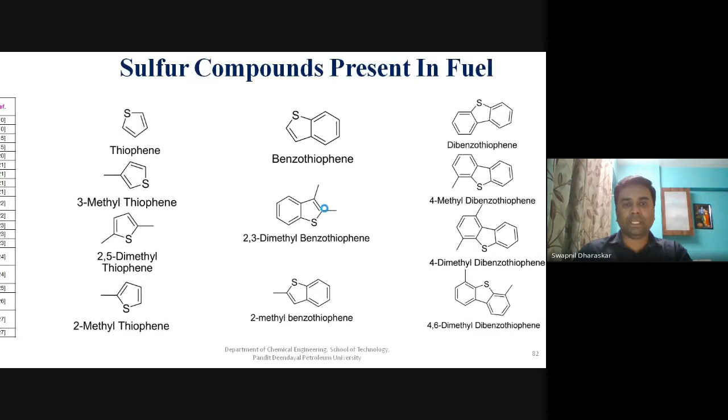These are the various compounds present in fuel, the various forms of sulfur compounds, including thiophene, 3-methylthiophene, benzothiophene, dibenzothiophene, and other compounds. These alkyl-substituted derivatives are present in fuel and very difficult to remove with normal processes. Still, many petroleum refineries and industries prefer the hydrodesulfurization process and follow the same procedure as usual.

But the major disadvantage of that process is that it requires a high amount of hydrogen and high temperature and other things. But if we go for an extractive or oxidative process, we don't require any additional catalyst or high temperature. You can run this process even at room temperature.

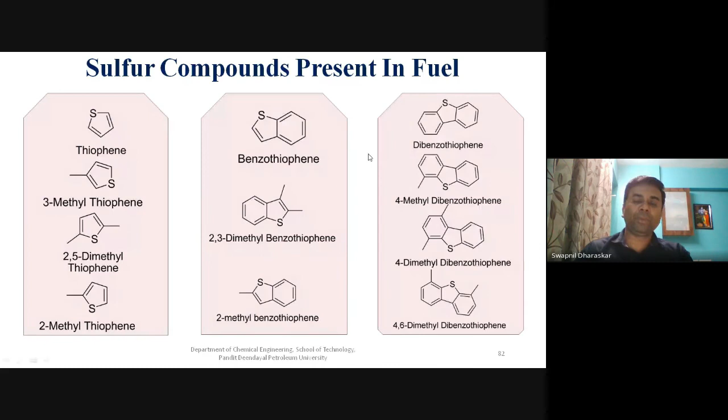So here you can see some processes, and we have already highlighted the do's and don'ts of the processes. HDS technique: high temperature and pressure required, difficult removal of aromatic sulfur content. The sulfur derivatives I have shown you are very difficult to remove by the HDS process. HDS could remove sulfur only up to 250 ppm, not below that. But extractive and a few other techniques can minimize the sulfur below 10 ppm. That's why these techniques are most popular.

And in comparison to ultrasound, even though we prefer ultrasound, we still need to follow up with extractive. First we have to go with EDS, and then provide ultrasound. So in my view, extractive desulfurization is the most efficient process, because in a single-stage operation it gives around 78 to 80% separation. And when you attach ultrasound, you can increase that separation by, let's say, plus 10%.

So many industries don't want to prefer ultrasound. They simply think, in comparison with HDS, if they are getting 70%, they can think about the EDS process, since they are getting up to 80-85% sulfur removal.

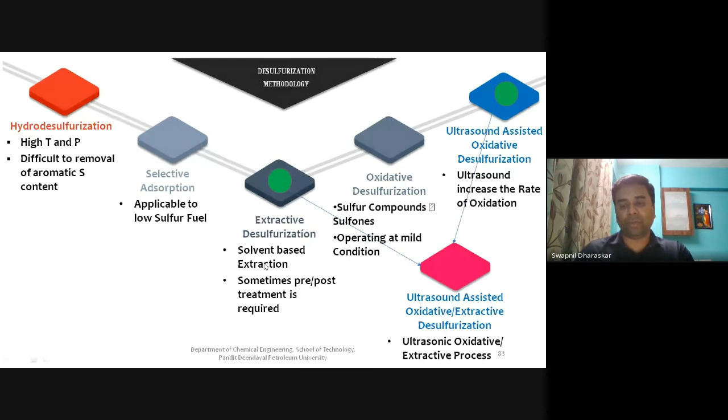And these are the various routes of ionic liquid synthesis: metathesis reactions, acid-base reactions, and direct combination of halide salts with metal halides. We can easily synthesize imidazolium-based ionic liquids, but for phosphonium-based ionic liquids you have special requirements. You have to provide inert gas and other things.

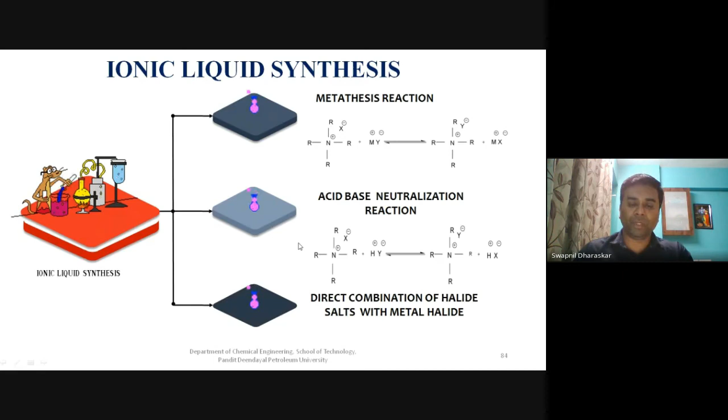You have to keep that batch under inert atmosphere. Then only the synthesis of phosphonium-based ionic liquids will be possible. Otherwise, you cannot synthesize the phosphonium-based ionic liquids. These are the properties, as I already discussed earlier. And this is the possible mechanism of both the processes, EDS and ODS.

And these two processes are really promising for sulfur recovery from the fuel stream and all. And you can recycle these ionic liquids for multiple cycles. As far as our study is concerned, we can recycle this ionic liquid up to 10 to 15 times, specifically in the case of EDS.

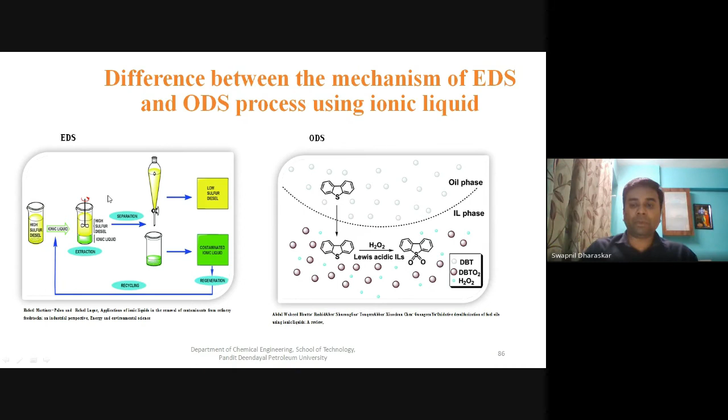But as far as ODS, means the oxidative desulfurization process, is concerned, here we can recycle this particular compound up to 6 to 7 times, not more than that. Later on, it gets saturated, and you cannot use that compound. You need to use a fresh ionic liquid for the continuation of your process. So this is all about the various processes, energy efficient separation processes, specifically for environmental sustainability.

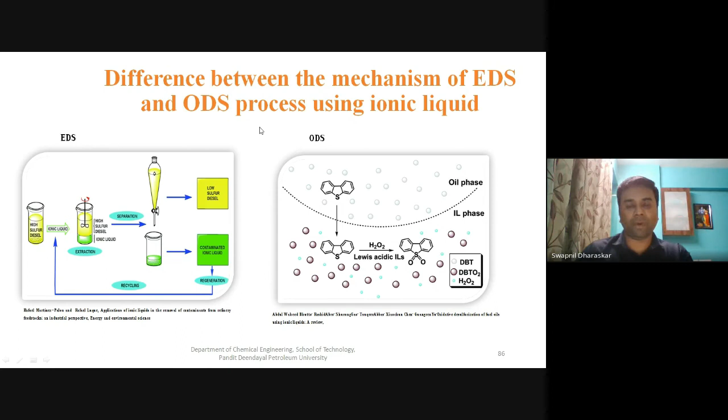And I strongly acknowledge the DST, because they fund us a very huge amount. They have given us two different mega projects. One given by DBT, almost 75 lakhs, and another project we have received from DST, up to 60 lakhs. Because of COVID we got stuck somewhere, but still we are trying to produce a good set of results to commercialize some technology, for the betterment of the industry and other things.